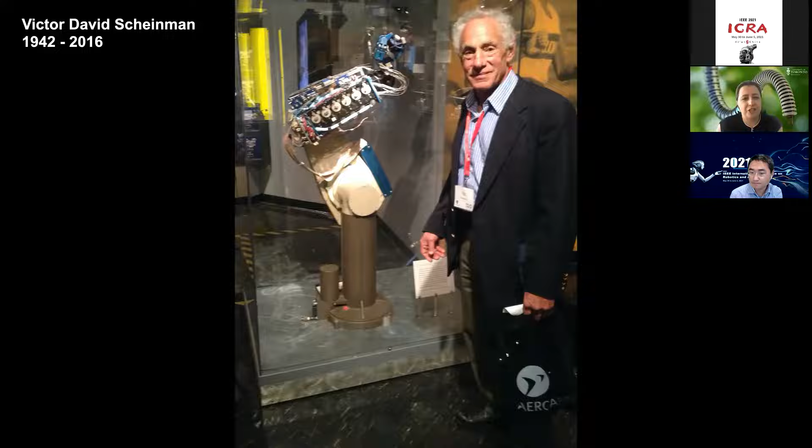What many people don't know about Victor Scheinman is that while he was a grad student at Stanford, he also developed and invented the first continuum-style robot together with Larry Leifer, another graduate student there, in 1965, even before the Puma robot. We can see the robot here on that slide. It's called the Orm, which is Norwegian for snake, and it was pneumatically actuated, using rubber sacks, 28 of those sandwiched between 7 metal plates. This little robot could achieve bending in 2 degrees of freedom.

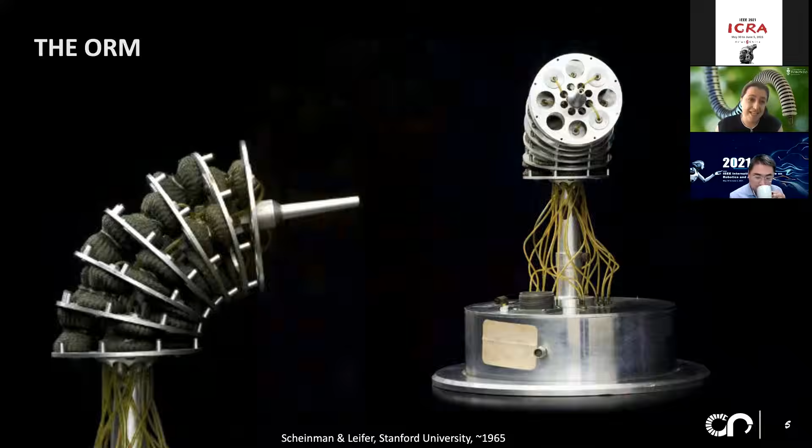Nowadays, the robot is on display in the Computer History Museum in Mountain View, California. If you ever happen to be there, have a look. It's a remarkable exhibition. Yet the Orm proved to be very difficult to control, since it was a pneumatically actuated robot, and it was abandoned because movement could not be repeated accurately. That's at least also what the display says. So the robot was quite a contrast to the Puma robot.

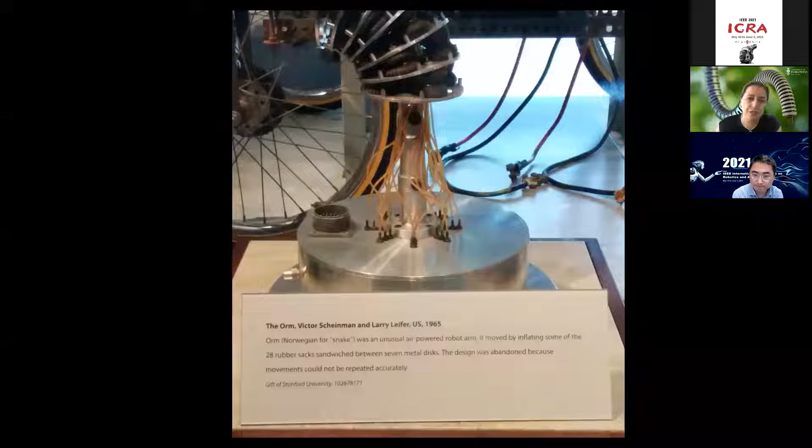Before we move on with some of the historical view on continuum robotics, I want to quickly define what we understand as a continuum robot. A continuum robot is an actuatable structure whose constitutive materials form curves with continuous tangent vectors. Continuum robots can bend, often extend and contract, and sometimes twist at any point along their structure.

Now, I will show some robots today that are strictly speaking not continuum robots by this definition, but would rather be categorized as hyper-redundant robots. Yet, as their appearance is quasi-continuous, I'm going to include them. The ORM was just one of them that is quasi-continuous.

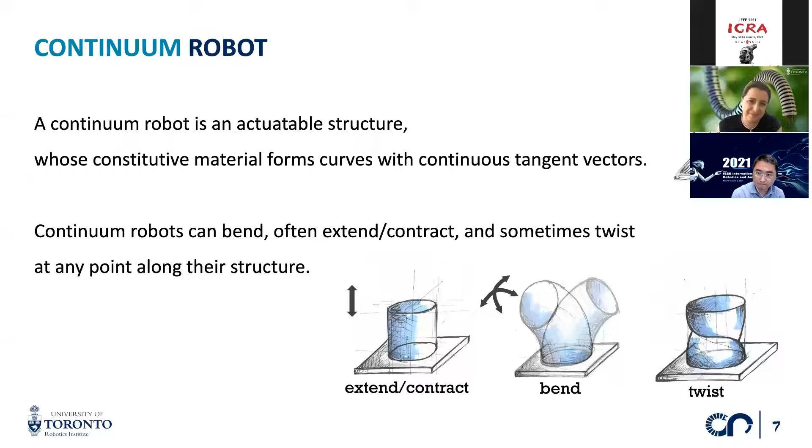Looking at that history, though, we can see that one thing is very common: the size of these continuum robots is very comparable to the industrial robot arms that had been developed at that time as well.

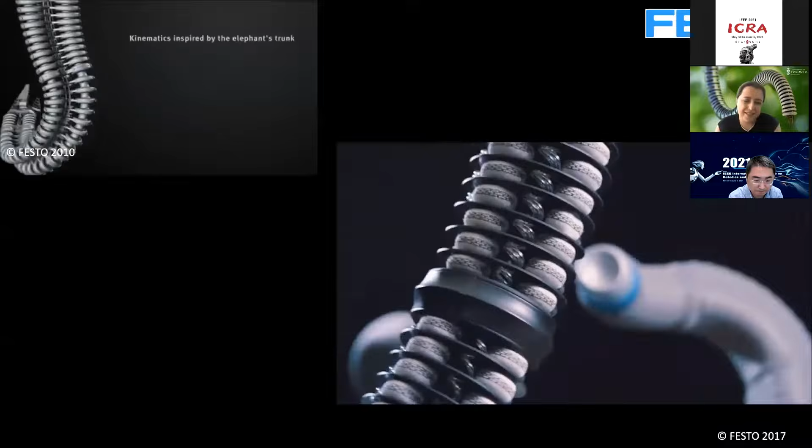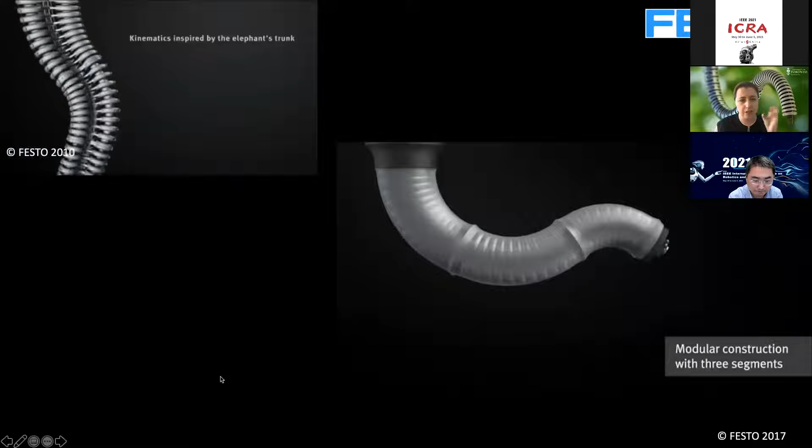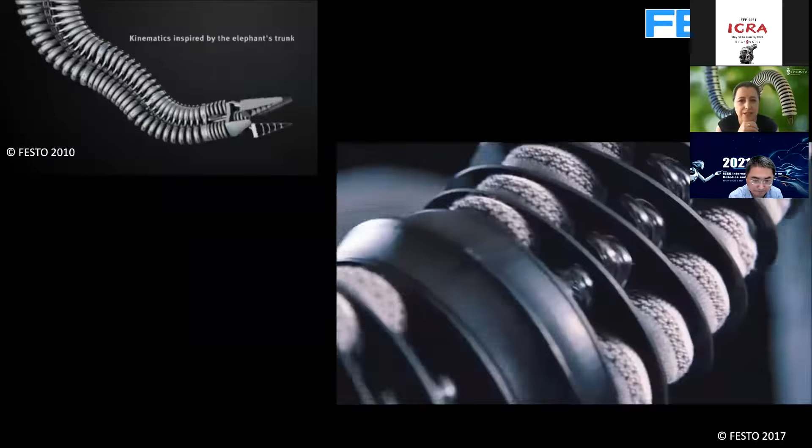Industry also picked up continuum robotics. Some companies took on these design paradigms. For example, Festo introduced their bionic handling assistant in 2010, which is showcased here. The latest version, more of a collaborative robot arm that we see here, is just a descendant of the first one. These robots are also great showcases for bionic inspiration by the elephant trunk, and also great showcases for technical advancements that Festo made, for example on pneumatic actuators, pneumatic control, and additive manufacturing, as these bellow structures here were additively built. Yet the size and payload of this continuum robot really bring no significant advantage over conventional jointed robots. So it's a great showcase, but probably not that much more.

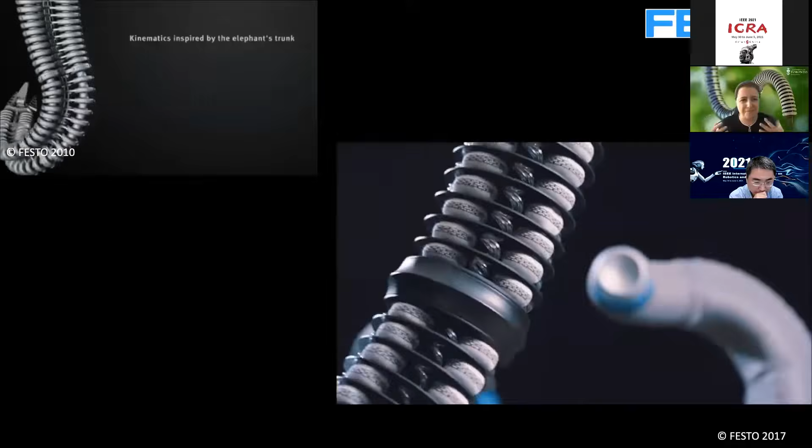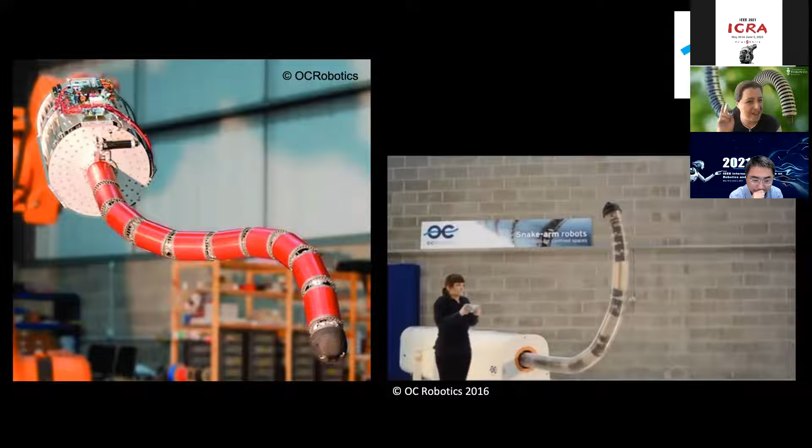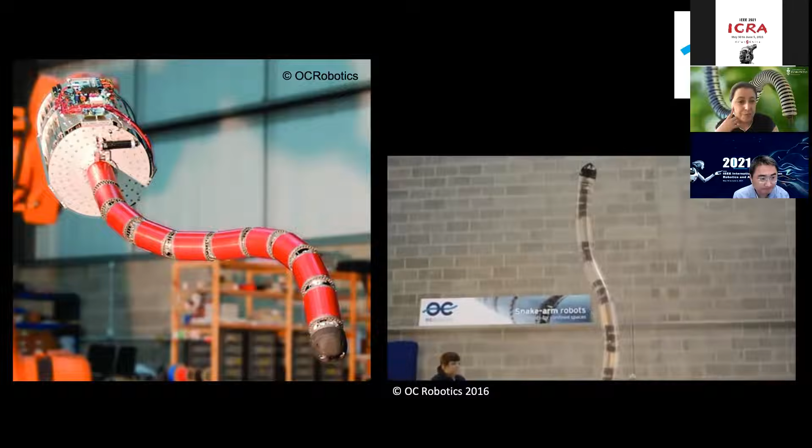OC Robotics also amazed us by building a very long cable-driven continuum robot, strictly a hyper-redundant robot. It's 5 meters long. The whole body is translated, as we can see, and 3 meters of that robot are actuated and can bend, as we can see in this clip. Also a great showcase for the continuum robotics paradigm. Yet here too, I fear that the benefit over conventional robots is not that major either.

In the last century, the third industrial revolution really kicked off in 1969 with the Puma robot and Unimation. Serial robot arms are really characterized by repeatability, accuracy, payload, and speed. As roboticists today, these are the four characteristics we mostly talk about: how accurate is the robot, how reliable is it, how fast is it, and how much can it carry?

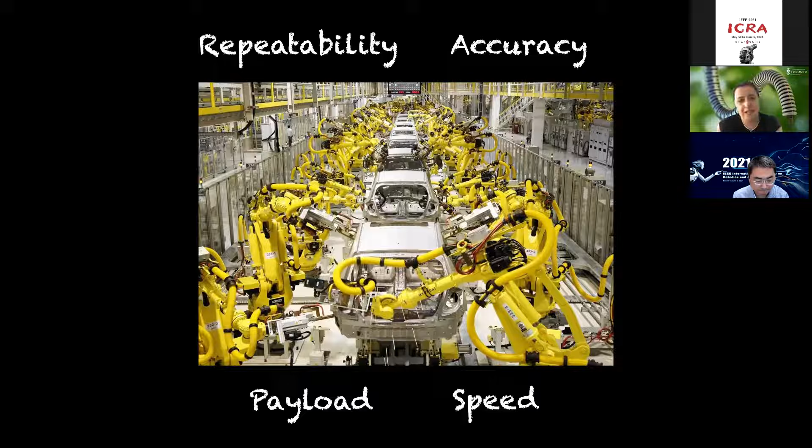And all of these are pretty much not the unique selling points of continuum robots. They are not known to be very repeatable, not very accurate, payload is pretty low, and they usually also move pretty slow. So when we conclude that history, we can see that all this exploratory continuum robotics research in the last century brought great advancements in terms of design, actuation, and modeling, yet continuum robotics really did not prove to have any superhuman capabilities. These large-scale continuum robots did not really bring a lot of benefit over typical robot applications in automation, so continuum robotics pretty much stayed in a niche research area.

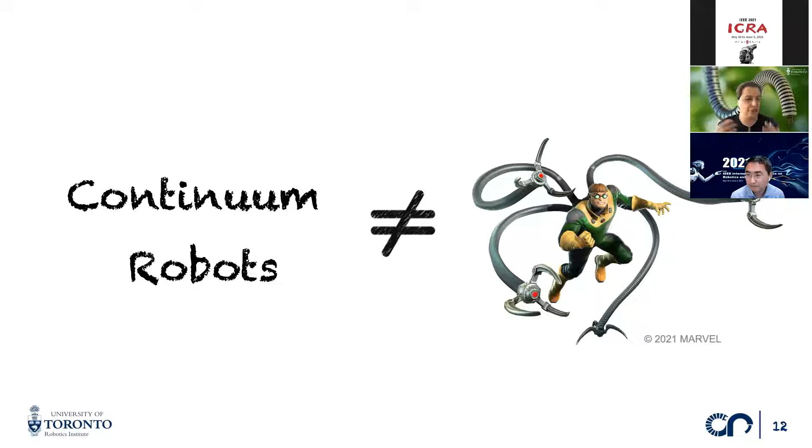Now, this low point in the history of continuum robotics research leads me to Act 2, where I'm going to talk about the medical success story of continuum robots.

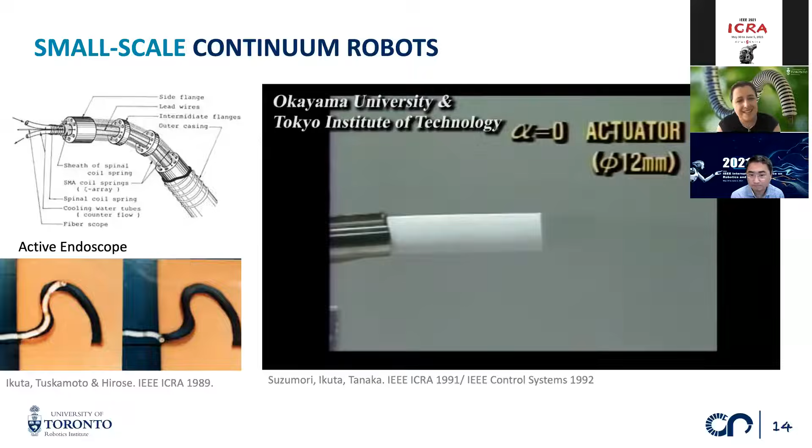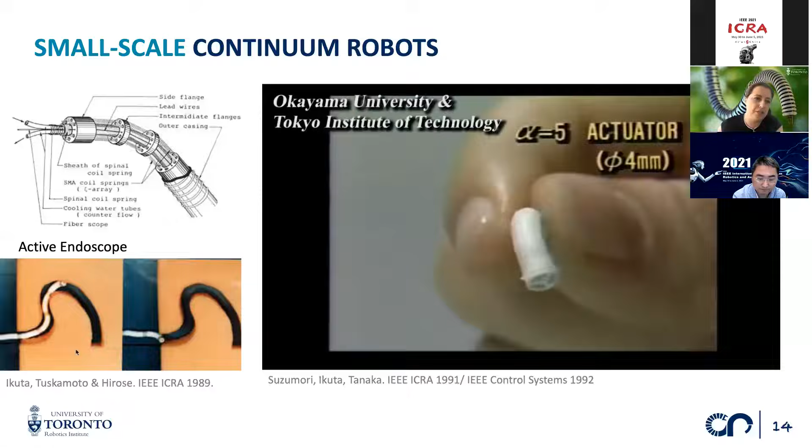Also in the last century, the very first work on small-scale continuum robotics appeared in the literature in the late 80s and 90s. I'm just showcasing two of these very remarkable works at that time, which also both originate from Hirose's research lab. On one side, we see an active endoscope driven by SMA wires to build a very small continuum robot meant to sneak into hard-to-reach places on tortuous paths. And on the other side, we see very small-scale soft-bodied pneumatic continuum robots.

With continuum robots becoming smaller in terms of their size and diameter, what became really apparent is that there may be a significant benefit over serial robot arms or industrial style robots in medicine. It was around the same time, in the mid-80s, when industrial robot arms were also explored for surgical robotics.

The Puma robot arm itself was used in a neurosurgical example, which really pretty much kicked off surgical robotics.

Yet in medicine, there's often the need for approaching any disease minimally invasively through a keyhole, leading to shorter hospitalization and shorter recovery times for the patient. Rather than opening the body at large, physicians prefer to make as small an access as possible to reach locations deep within the human body where cancer or other disease might occur. For example, deep-seated tumors within the brain we may want to reach on nonlinear trajectories, or suspicious nodules within the lung, cancer in the urethra, at the kidneys, in the heart. All these medical scenarios have in common that they are very hard to reach locations, with tortuous paths to overcome, and at the same time we have to respect task and anatomical constraints.

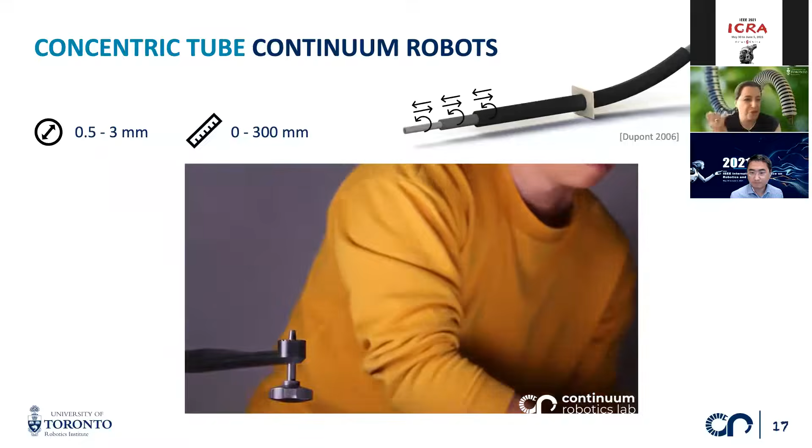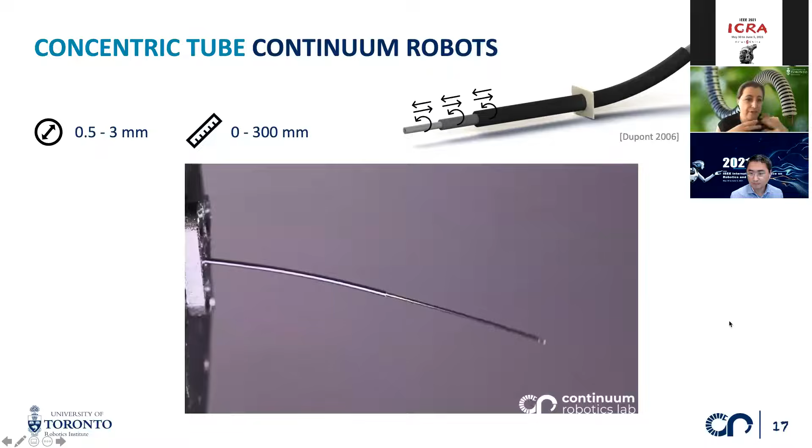The first continuum robot I focused my early career on was the concentric tube continuum robot that many of us may know. For those who don't, I want to quickly tell you how it works. It's the smallest of all continuum robots. You can see it's very small in terms of size. It can be up to 30 centimeters long and has a diameter of only 0.5 to 3 millimeters, like a medical needle.

It's composed of several concentric tubes that are super elastic and nested inside of one another. You can relatively translate and rotate those at their bases, and they will elastically interact, which defines the motion capabilities we see here, often referred to as an almost tentacle-like motion behavior. At this small scale, this continuum robot is predestined for medicine, right? It can achieve very many things within the human body at that needle size factor.

In the next couple of minutes, I want to spend some time and talk about three example projects in medicine that I have been working on, which are characteristic of this success story of continuum robotics.

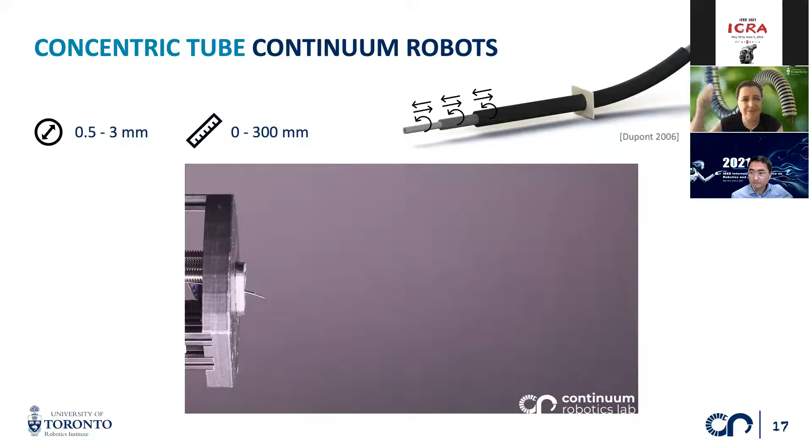Typically, surgical robotics research is top-down research. We talk to clinicians, have clinical collaborators that tell us what they would like to do better in surgery, what they can only hardly do today, or what is even impossible for them to do with current tools. Then as surgical roboticists, we come in and say, well, we can build you a robot that can probably do better, or can reach places that you may not be able to reach.

So when I started on continuum robotics in 2010, Caleb Rucker had just finished his derivation of a geometrically exact model considering external loads on concentric tube continuum robots. We took his work and built on that.

It was also around these years that I started off my work on computational design optimization on concentric tube robots.

So there were all these firsts and we were really excited. And while this application at the skull base may have not been the one that concentric tube robots really are best for, it very much brought attention from a lot of physicians and clinicians to this type of robot.

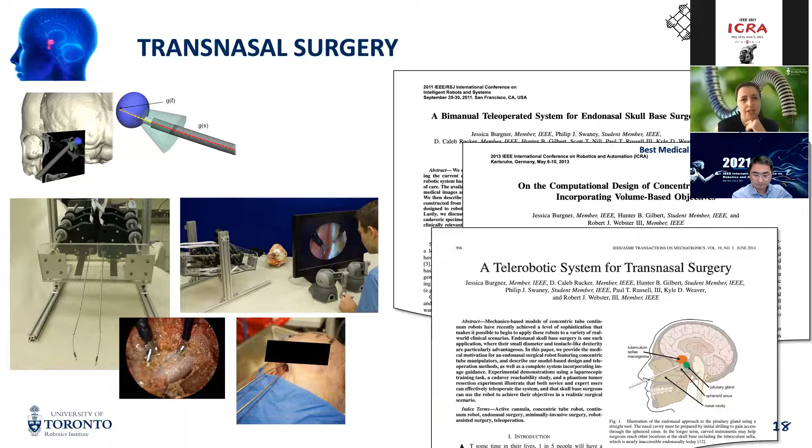And so we happened to find a really promising area of concentric tube continuum robots in keyhole surgery. Here I'm showcasing some of the work we have been doing in neurosurgery, where a concentric tube robot could be used to enter into the brain through just a very small burr hole on the skull, to remove, for example, a blood accumulation in treating a stroke patient by sucking out this blood. That's what we see here with this intracerebral hemorrhage evacuation system that we have been building.

Or one could use the concentric tube continuum robot to guide a laser fiber through the center and use that to ablate a malignant tumor right in the center of the brain, just through a tiny incision. So also here, our research was very much top down in terms of application. And we built this autoclavable actuation unit.

We had the idea of maybe using simpler concentric tubes, but exchange the tubes in the surgery to achieve coverage. We further worked on design optimization. We looked at multiple competing objectives in how to choose the precurvatures of these tubes to have a certain motion behavior and reachability, which eventually led to the PhD of one of my first grad students, Josephine Granna.

We developed algorithms for 3D volume coverage that may even go beyond applications in continuum robotics. And so that's really exciting, and it shows how top-down research and bottom-up research can go really hand in hand and lead to great advancements.

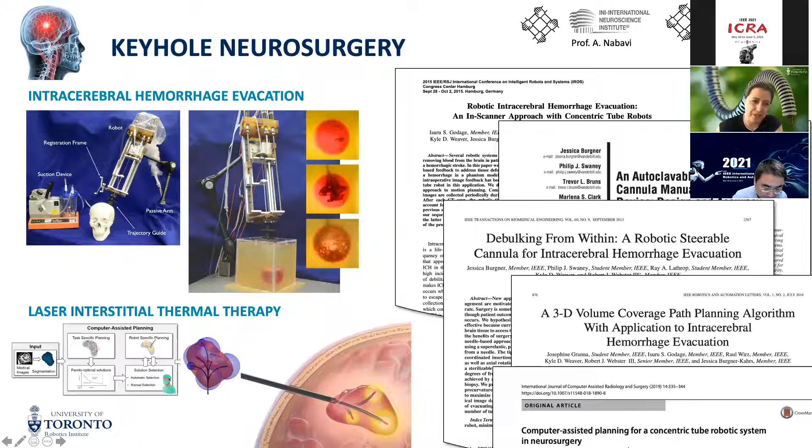And the third example I brought today is moving from the brain to laparoscopy, where we figured we could support single-site access surgery with continuum robots as well, because typically what you do in single incision surgery, you enter the abdomen through a single incision, for example, at the belly button, but usually you use a straight port and then you deploy instruments through this straight port.

And so the idea that we had is using a continuum robot, so a continuously bending port, to enable the ad hoc reconfiguration of that port within the abdomen to change the viewpoint and also to change the access to the surgical site, for example, to remove a kidney tumor, as we can see here.

And while this in itself is already a cool idea, we also worked on, can we then stiffen up that continuum robot to serve as a stable base? Because obviously deformation should not happen once you deploy additional continuum robotic instruments from that port to perform surgery. So the port features like these 3 channels for instruments to be then used through it.

This work was pretty remarkable. It led to the PhD thesis of one of my other grad students, Ernar Amanov, who also went into the operating room with all our clinicians to assess the requirements. They did laser scannings of the abdomen. They did probing of the inner organs to decide what distances, what view angles would be desired, and so on and so forth.

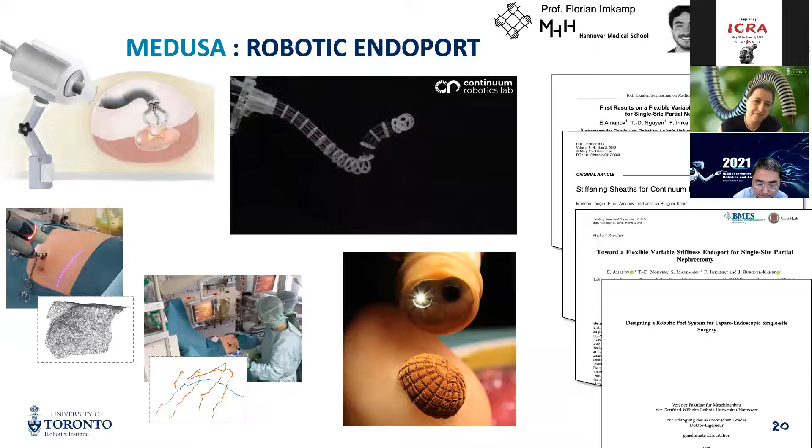So really exciting work showing how continuum robots could benefit surgery in multiple different disciplines. And so I could probably spend the remainder of this keynote talk and probably various other talks to just talk about all these various amazing research projects in continuum robotics in interventional and surgical applications.

Some of them I feature here on this slide, which is unfortunately not exhaustive. I'm already sorry if I didn't feature your work on here or your favorite continuum robot in surgery. But you get the idea, there has been so many great contributions within our field, exploring continuum robotics for all sorts of different applications in the human body to gain access to various locations.

And while you may think that surgical robotics research in academia usually stays on the benchtop or doesn't go much further, in fact, continuum robotics successfully found its way into medical products over the past couple of years. And so that's really a huge success for that field. And I want to feature some of those clinically used continuum robots in the following.

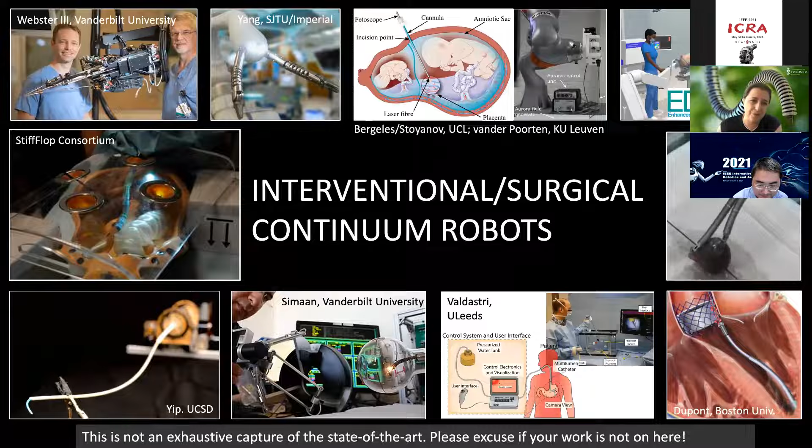Here we see interventional continuum robots that many people may not think about as continuum robots, but robotically steered catheters are in fact continuum robots. They are long and limp, only actuated at their tip. The environment, the vasculature, provides a tubular structure not much larger in diameter than the robot itself. By pushing and rotating it on the back and actuating the tip, we can steer through the vasculature to reach locations in the heart and brain to perform interventions.

We can take this concept further, like Auris, and build a robot for bronchoscopy, where you use the airways to reach into the lung for inspecting or taking a biopsy of suspicious nodules. This keeps the physician out of radiation, improves the steering capability of these catheters and bronchoscopes, and allows teleoperation as a scheme for making surgery more efficient.

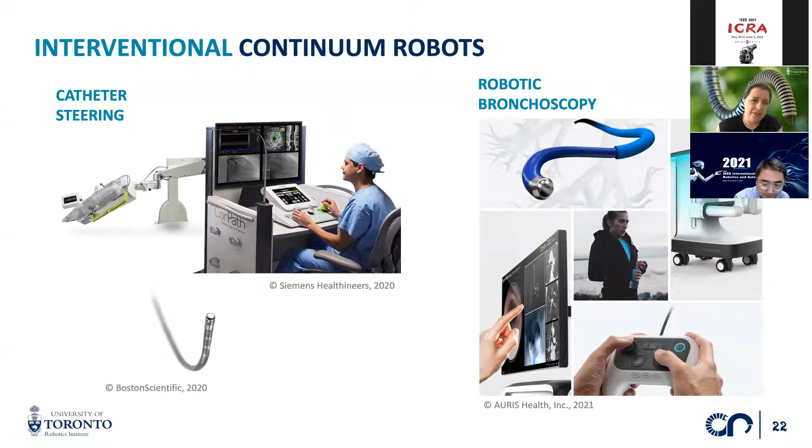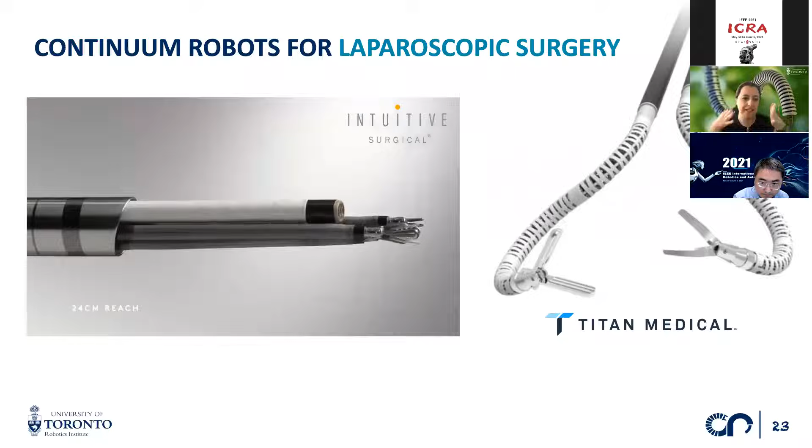As soon as we operate continuum robots in open spaces, we use different types of robot, not the limp ones, but ones that can withstand their own weight. We see a couple of those here. One system is from Intuitive Surgical, also targeting single site surgery, like the bendable endoport we saw earlier. Here we see the straight version of it.

We also see Titan Medical's continuum robotic system for single site laparoscopic surgery, which I believe is up for commercialization with Medtronic anytime soon.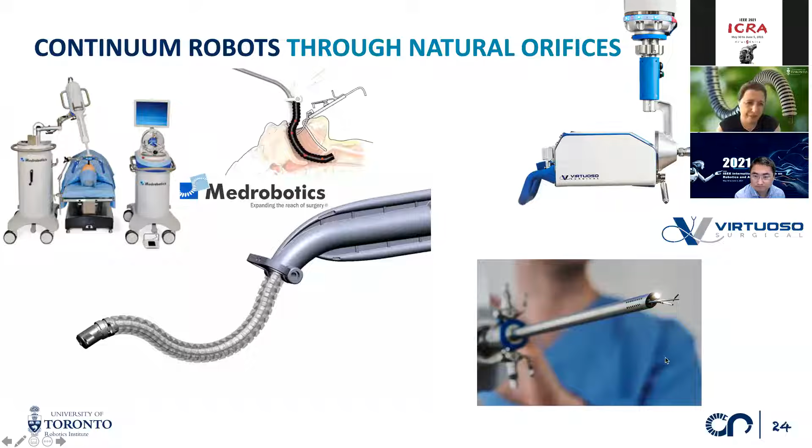So we can probably conclude that second act of my keynote by stating that continuum robotics found a very compelling application area in medicine. It's fair to say that the next generation of continuum robots in surgery will probably work hand in hand with surgeons, as we can see here. And it's a little bit tempting to say that continuum robotics is purely medical or surgical robotics.

That brings me to the third act of this talk, where we're entering the climax, and where I want to take a step into the future with you all, and put a spotlight on the unexploited. I want to invite you to think outside of this medical surgical robotics box and think about what we may have overseen in terms of opportunity spaces.

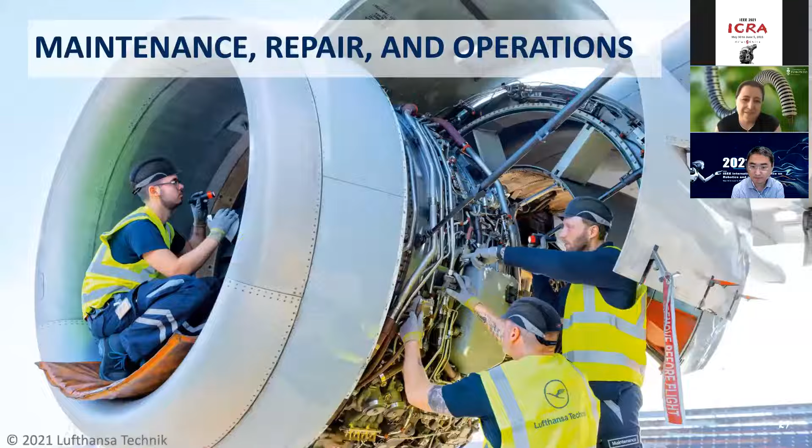I want to start this third act off with an example application I have been thinking about, a concrete example of another domain where continuum robotics could be useful: on-wing jet engine inspection. We see here three technicians checking all the components of a jet engine on wing, using borescopes through very tiny access points to check hundreds of turbine blades on the inside for any issues.

If they find an issue, they would take the engine off wing into full service and replace it. If they oversee an issue, we unfortunately may see it on the news. Happens from time to time. This is just a recent case where a United Airlines flight had to emergency land in Denver because the engine blew off.

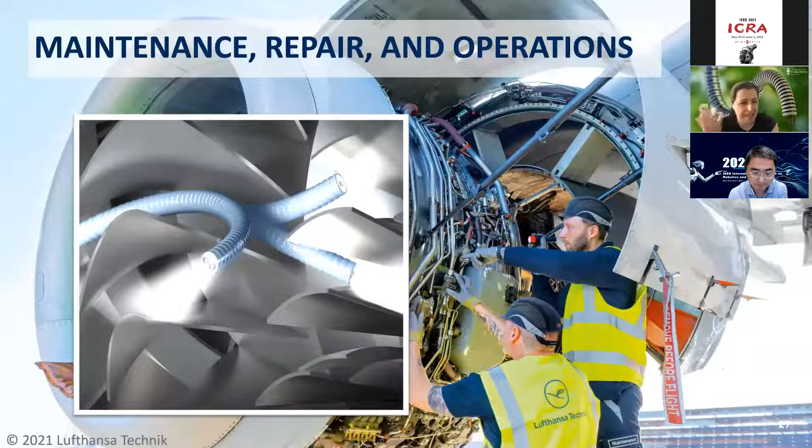Now looking at this application, we can probably take our expertise from the surgical domain and keyhole access surgery to automate this process, to use a continuum robot and automate the inspection, save time, save costs, save labor, and add safety to this whole procedure by just having the continuum robot do it autonomously.

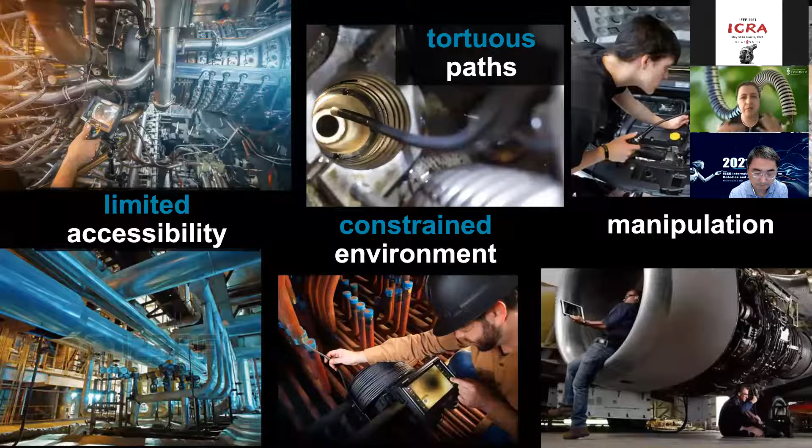And when we start thinking outside of the surgical box domain, a lot of applications reveal themselves that are characterized by similar requirements: limited accessibility, being in a highly constrained environment, needing to overcome tortuous paths, and the necessity to be able to manipulate once you reach a location where you've found something that needs to be repaired or inspected closer.

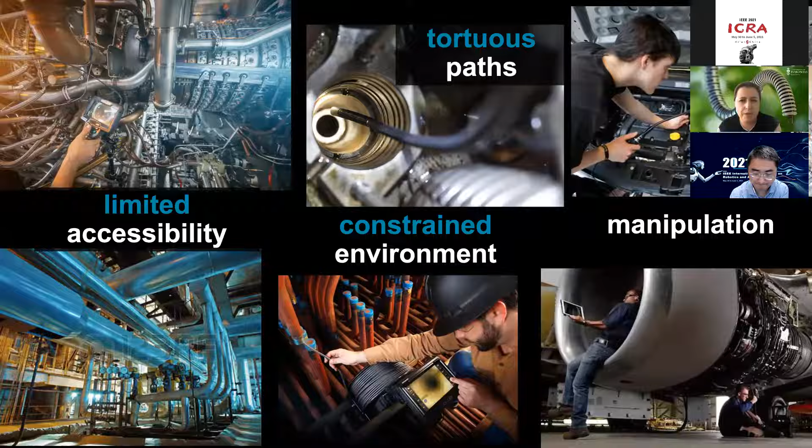Facilitating in situ non-destructive inspection of tubing, pipes, and complex machinery is really huge in many markets, such as aerospace, nuclear energy, oil and gas, and chemical industry. Not needing to disassemble any of this machinery, not needing hunched body postures, manual hour-long labor, and fiddling with manual tools or special purpose devices is really a great motivation for exploiting continuum robotics further.

Moving outside the domain we know well in continuum robotics—the medical and surgical domain—we also have to rethink continuum robot design. In medicine, we designed continuum robots that were somewhat small and didn't need to be long because the distances were not that large. Now we need long and thin continuum robots, which hasn't been looked at much. We may have larger access points and be less restrictive in material choices since biomedical compatibility isn't as important anymore, so the design space becomes larger as we broaden the scope.

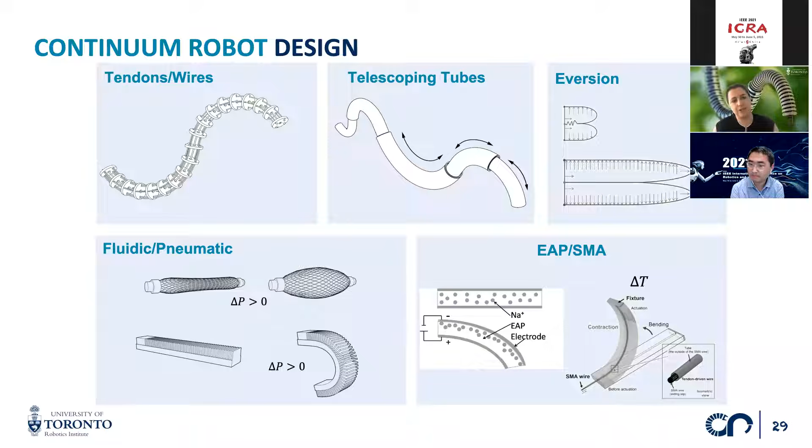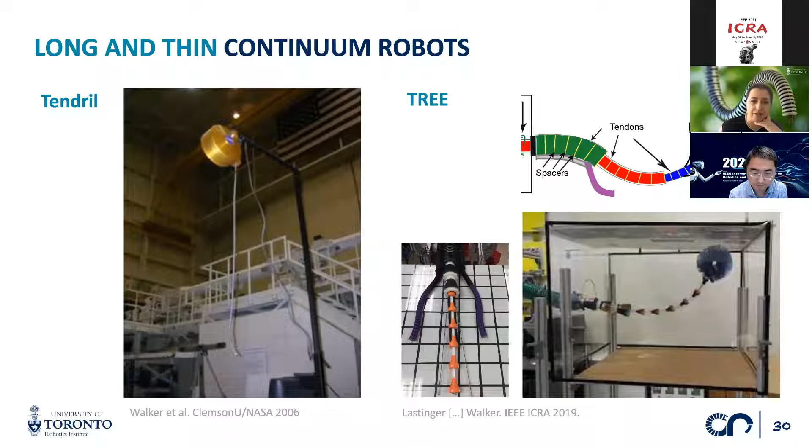Very few researchers have looked at in-situ inspection and repair using continuum robots. There has been progress in the scope of the EU project MiRoR, around Xin Dong and Dragos Axinte from the University of Nottingham, and also Kai Xu's group at Shanghai Jiaotong University looked a bit into continuum robotics for these in-situ inspection tasks.

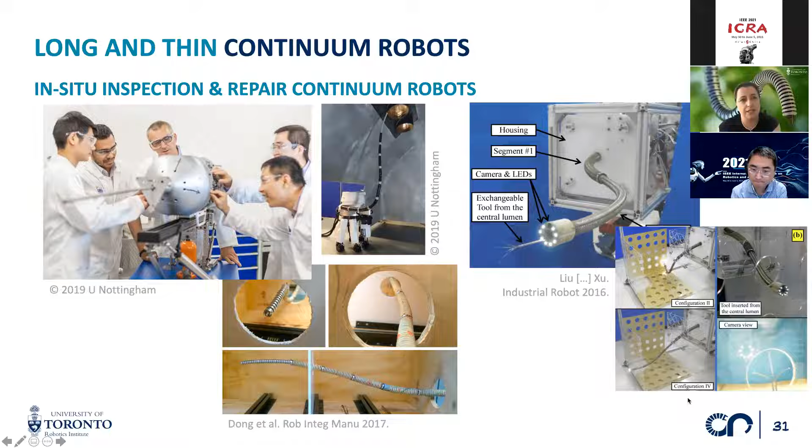We've also recently started to see larger diameter continuum robots making their way back into meaningful applications, as the vine robots were proposed by Elliot Hawkes and Allison Okamura in 2017, which we've all seen on the Science Robotics cover. This growing, eversion-type continuum robot has received increasing attention in the past couple of years.

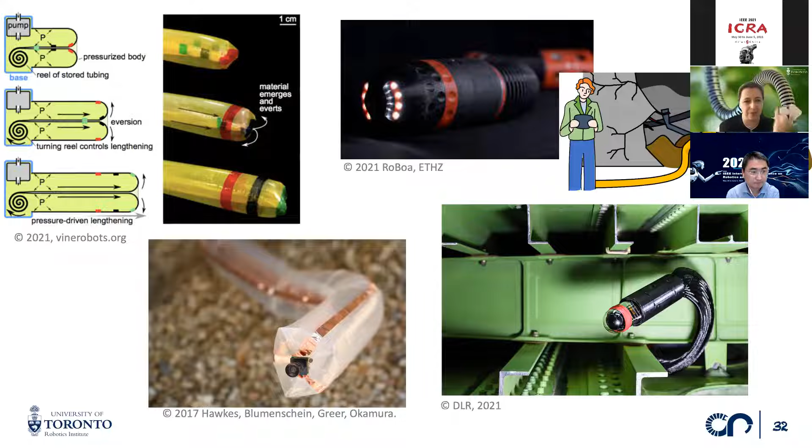This shows two examples: the Roboa from ETH Zurich, meant for search and rescue operations using eversion as an actuation principle, and very recently some work from the German Aerospace Center, where they built a continuum robot for fuel tank inspection. What's great about this eversion principle is that the robot can grow into an environment, deploying without needing to translate the whole body, which I believe is really important as we inspect partially unknown environments.

Our take on enabling extension and contraction in continuum robotics is building a continuum robot that uses the best of two worlds. We use tendon actuation for active steering of individual segments, but also utilize the concentric tube paradigm to achieve variable length in those sections.

An individual section is composed of one tube that extends and contracts, with the end disc affixed to it, and we use tendons to induce the bending motion. The tendon routing discs are composed of magnets at alternating polarity orientation, so that they always distribute equally and guarantee good bending behavior.

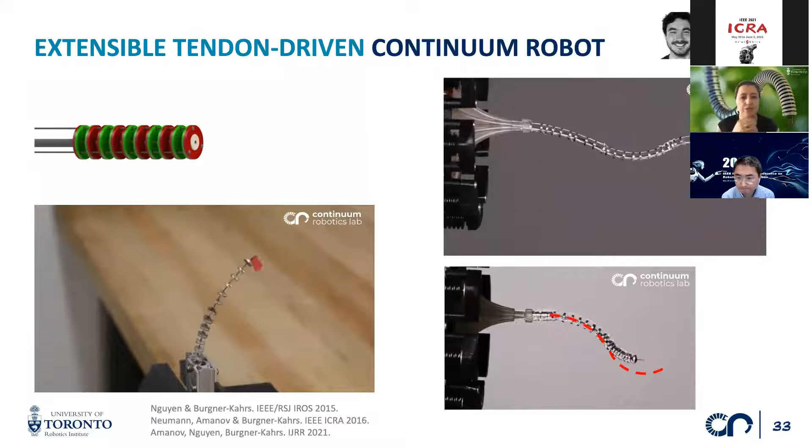In these videos, we can see some of the 3-segment prototypes that we have been building by steering in 3D, by spatial steering, and also by performing a follow the leader motion. We have also recently started to explore that a single segment can achieve torsion as one of the motion paradigms we've been seeing earlier: extension, contraction, bending, and also torsion. Now we have a robot able to achieve all of these motion paradigms in a decoupled fashion, which is really exciting.

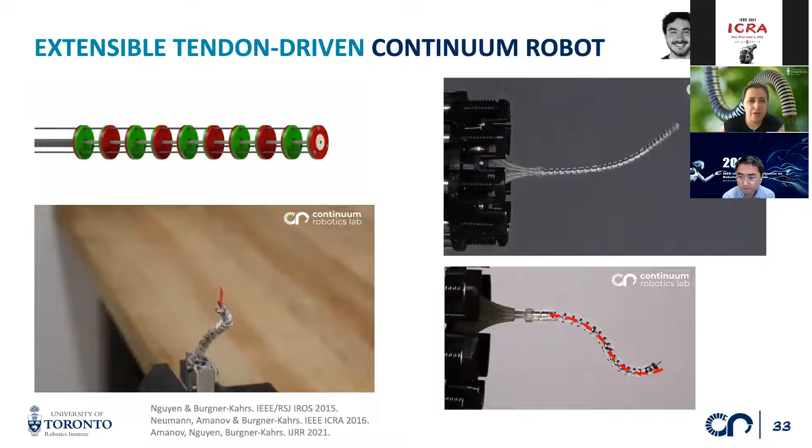Yet in making this robot much longer, we will run into weight issues because the magnets and the tendon routing discs will increase the weight of the robot, and we may soon have stability issues and buckling. So we have been looking at how to build a lighter weight, longer yet steerable structure, and have recently proposed this origami tendon-driven continuum robot at Robosoft, where the origami builds the sheath and also supplies the tendon routing, and the center is a concentric tube mechanism to allow for full extension and contraction of the segments.

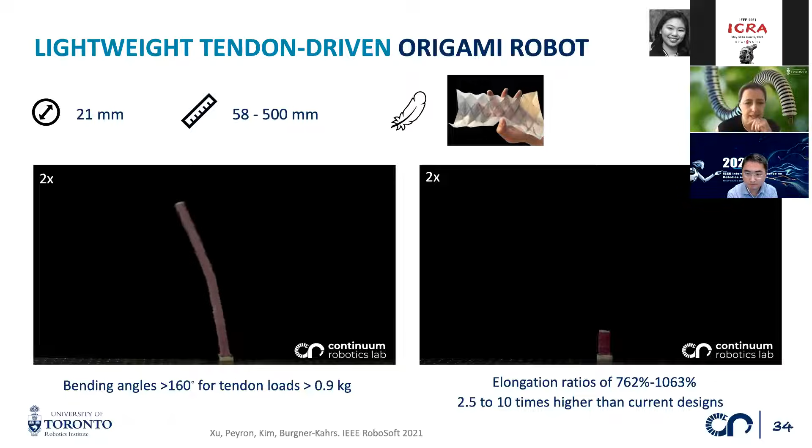While this is all really promising, we have also been scratching our heads about the accuracy and repeatability question, which as I mentioned earlier is not a unique selling point for continuum robots. Yet we believe we may overcome some of these limitations by combining tendon-driven continuum robots in parallel structures.

This has been a line of work we started about 3 years ago, looking into using tendon-driven continuum robots as the active components in parallel robots. Here we see planar and spatial designs. The spatial design will be presented in the Continuum Robotics 2 session later today by Sven Lilge, so join him to learn more about the robot we're seeing here.

I also go much more into detail on our parallel tendon-driven continuum robot work in the Parallel Robots or Not Parallel Robots workshop on Friday, I believe.

What's great about these parallel robots using tendon-driven continuum robots is that the tendon-driven continuum robot itself is very useful because it can individually actuate and move into a desirable workspace, as we can see a little bit here. Then they can be joined temporarily as parallel continuum robots to perform a task more accurately, more repeatably, and then move out again as individual robots.

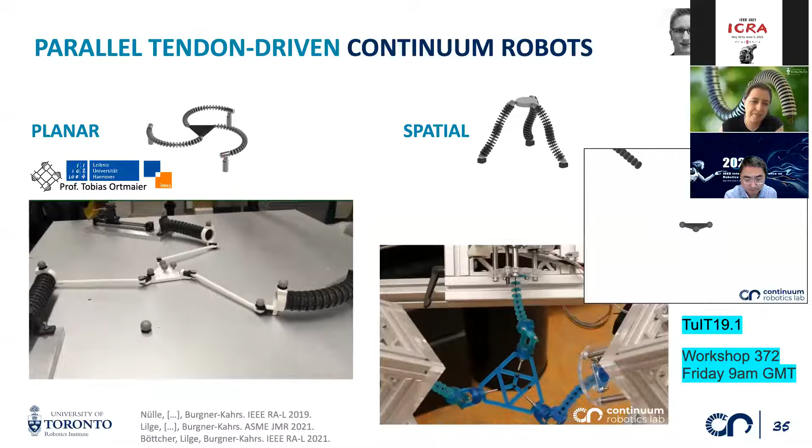Talking about tendon-driven continuum robots, we have also taken on the endeavor last year to unify and formalize tendon-driven continuum robot models, as there are very many out there. We created a guideline for the community, available open access on the Frontiers in AI and Robotics journal. We also released the code open source for all these models for the community to use as a gold standard to compare their results with.

I just want to quickly touch on the modeling aspects that are important to consider, because we are looking at a continuously bending structure. There are multiple ways to represent the robot: we can differentiate between lump parameters and distributed parameters. In the lump parameter paradigm, we can discretize the shape of the continuum robot and represent it by a finite number of parameters, with certain assumptions—for example, that the robot undergoes constant curvature, or that there are no external loads.

We can use this minimum or minimalized parameter set for kinematic and static modeling. You can join Priyanka Rao's talk in the Continuum Robotics 1 session later today to learn about Euler curves as an example of how to create a lump parameter representation that is very valid for continuum robots.

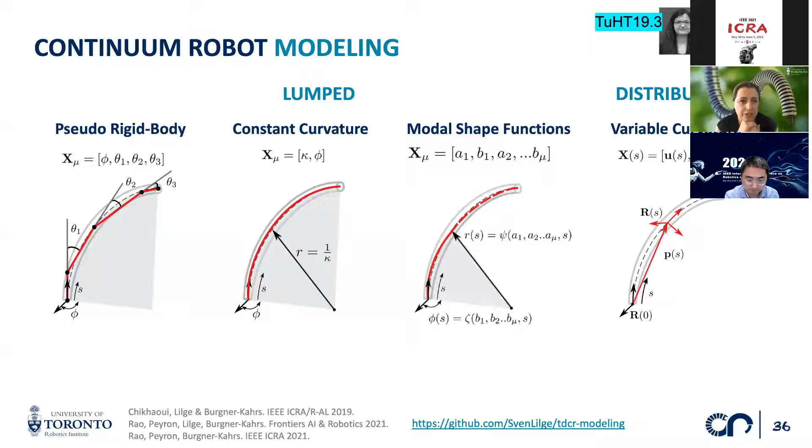Yet the model is complex and highly nonlinear. And if we want to be computationally able to cope with this in real time, we need to find a sweet spot. The sweet spot we have been finding was the Cosserat rod theory in order to solve these models. And if we calibrate the model really well on a physical prototype, the rule of thumb today for these physics-based models is that we can achieve an accuracy at the tip of 1.5 to 3% with respect to the length of the robot. So the longer it gets, the worse it gets as well. Makes sense.

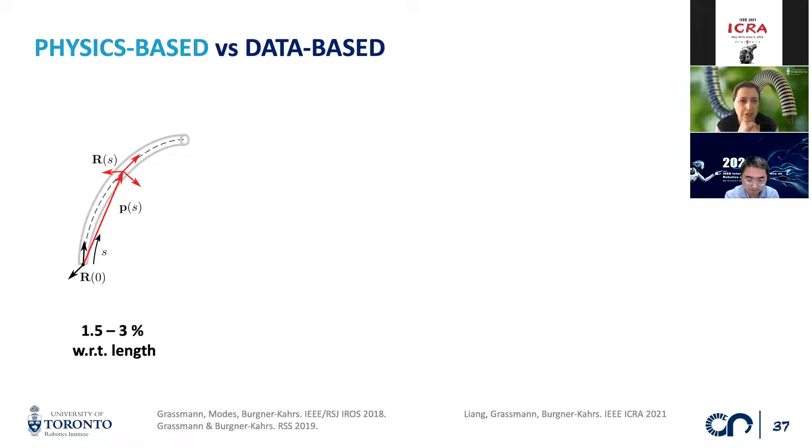Yet there's clearly room for improvement. And so we have been looking at using machine learning to overcome this.

Complexity of the model and the high nonlinearity, by just collecting data on the robot behavior. There has been some really cool work by Reinhard Grassmann, a PhD student in my lab. He has been looking at forward and inverse kinematics and has been showing that there can be significant improvements on the accuracy of the model.

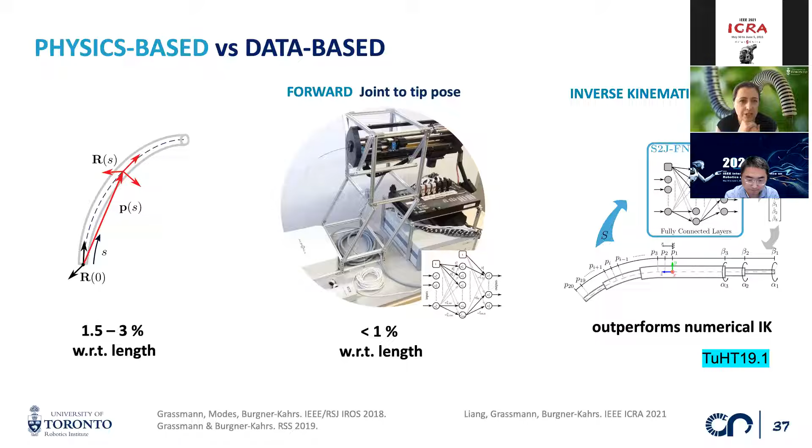And also later today, in the session right after this keynote, Continuum Robotics 1, Nan Liang, a grad student in my lab, is also going to present on our recent work on inverse kinematics from shape to joint. He shows that a learning-based model can outperform numerical inverse kinematics by far, which is very exciting. So that whole model inversion using learning is really exciting for control of continuum robots.

Continuum robot control is arguably not sufficiently explored today, in my understanding, because in the medical domain, we were good enough to focus on teleoperation most of the time. The physician stays in full control. We rely on the human in the loop. The human closes the loop, so many things have been easier because of that.

But there's a huge opportunity space that's really not explored to its full extent, because now that we're moving out of that medical box, we can move towards more autonomy of continuum robots as well. And so there are exciting problems to solve, such as controlling the full body, its shape, its contact with the environment. So many things to do, yet there are challenges inherent to continuum robots, which make this an exciting research area as well.

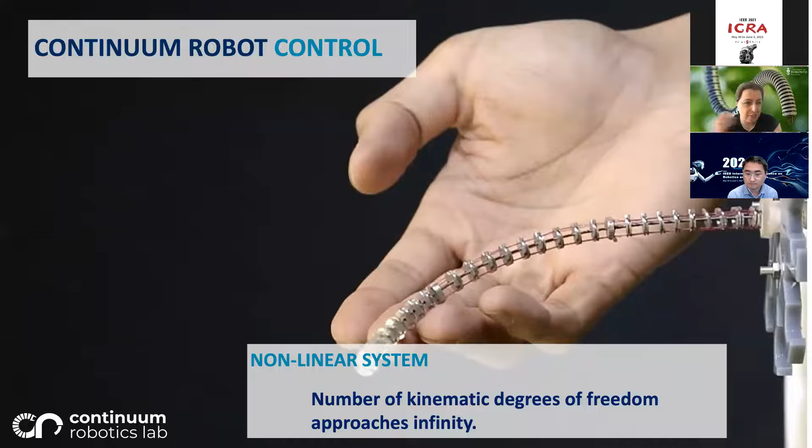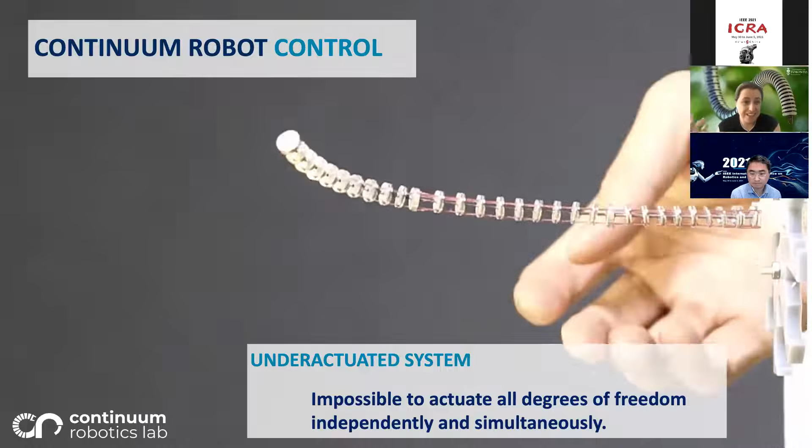So we are facing a nonlinear system as the number of kinematic degrees of freedom approaches infinity. We are also facing an underactuated system. It's impossible to actuate all these degrees of freedom independently and simultaneously, which makes it exciting to deal with as a control problem. And lastly, it's also an ill-observable system. It's impossible to obtain sensor information on all these degrees of freedom.

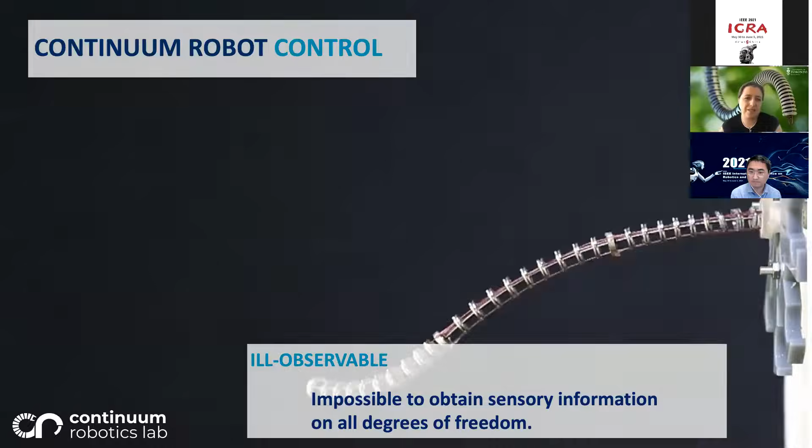And on top of that, we may also have a very different sensor selection now that we're outside of this medical box. We may be less restricted, but we may also face new challenges because the workspace that the robot is currently covering may be larger. And so covering that with sensing means may also be challenging.

I just want to give one example of underexploited areas in the control side of things, and that is redundancy. We can see on that slide some of our attempts and work on adapting null space projection methods and weighted damped least squares approaches to achieve secondary tasks by resolving the redundancy in the system.

We see this 3-segment tendon-driven continuum robot with the extensible sections that I've been showing earlier here, performing a task, position controlled. On the left, we see it circling a path, and here we see it deploy along a path. And as a secondary task in this weighted damped least squares approach, we are enforcing additional constraints on the shape that we envision with this green sphere here.

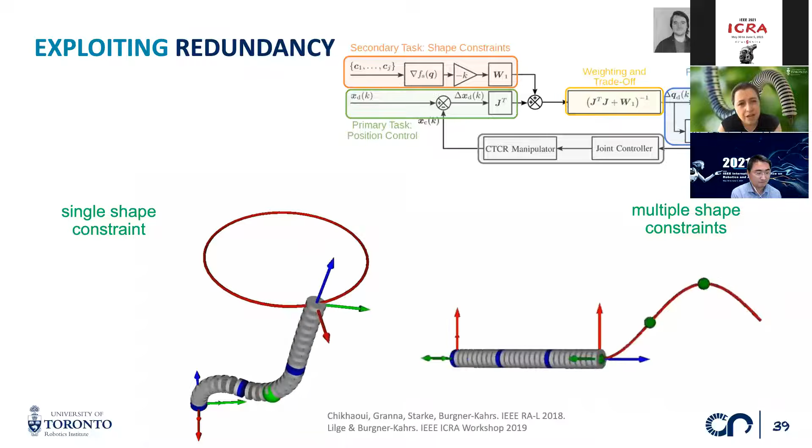So the robot is not supposed to move its shape away from that constraint. And so while these conventional approaches adapted into continuum robotics work reasonably well, I believe that there needs to be more thought into exploring and formalizing the redundancy that is in continuum robotic systems, because it's a continuous bending structure in terms of its shape. So there could be more to it than what we can exploit right now on the surface. And that is really exciting.

Moving even one step further, I think it's also important that as we think about deploying these continuum robots into unknown or partially unknown environments, with or without a digital twin, there is so much room to exploit morphology and collaboration of these robots.

So we may not only rely on these actuatable degrees of freedom, but we may want to exploit the embodied intelligence in the system, the inherent compliance in the system. We may want to purposefully interact with and make contact with the environment for steering.

Rather than focusing on coming up with one Swiss Army knife, long and thin continuum robot, we may want to think about having multiple continuum robots collaborate with each other to attain a certain task.

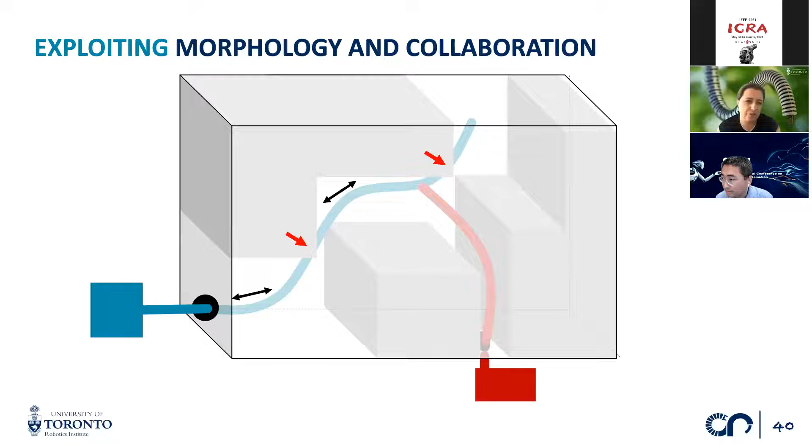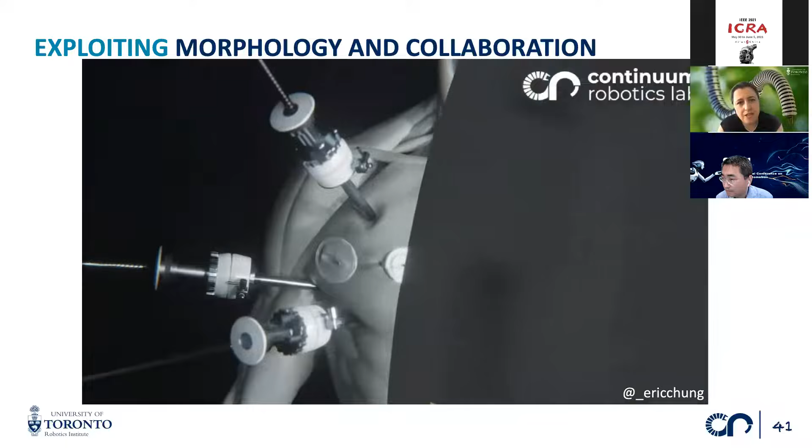By entering through multiple entry points and supporting each other, we can see that what we learned inside that medical surgical box in terms of keyhole access serves as a great inspiration for the future of continuum robotics.

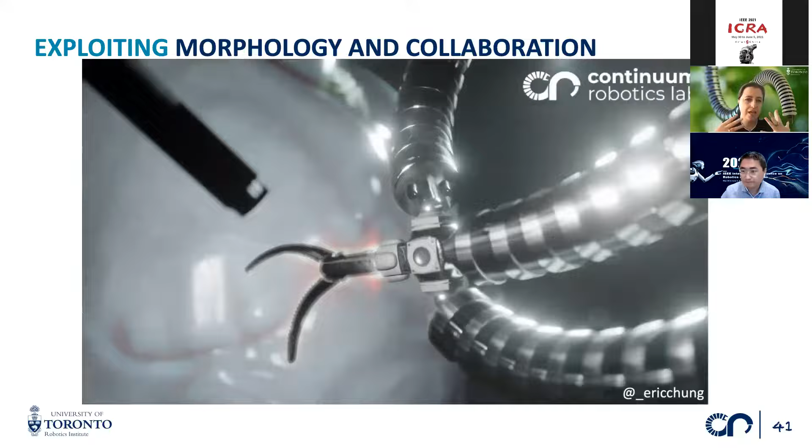This multiple arm collaboration on tortuous paths and coordination of their manipulation can really take continuum robotics to the next level. And I'm convinced that continuum robotics has not yet reached its peak. There's so much more to explore.

And with that, I would like to conclude the keynote by taking you a step even further into the future of continuum robotics. And while we watch this last video clip, I want you to think about what continuum robotics could do in your domain.

With that, I conclude this keynote talk. Let's all think out of the box.